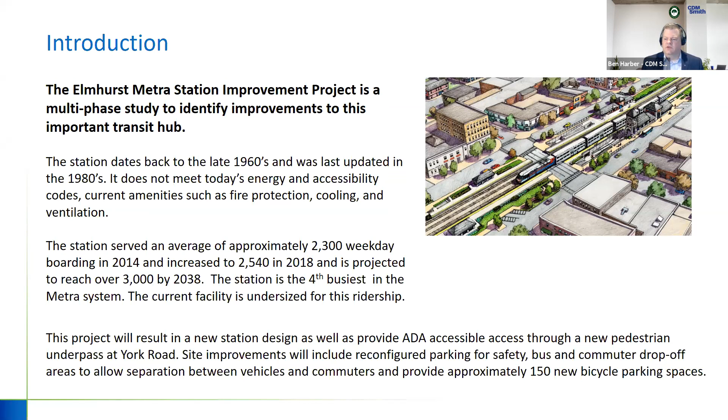So I'm just going to talk a little bit about where we are in the process. As Mayor Morley mentioned, phase 1 engineering was started in late 2016, early 2017. We looked at many different alternatives at that point of relocating the station, renovations to the station, what those impacts would be, and then developing a preferred alternative, as we call it.

We've been working with the Illinois Department of Transportation and our partner agencies, as well as the city, to move through that process. Once we completed or near the end of that process, we have a station footprint, we have a site plan, which I'll explain what that means, but the general plan is in place.

One of the key elements that we want to work with you and the city to develop is the architectural style. So the first part of our phase 2 process are meetings such as this, developing alternative concepts, which I'll discuss, and then moving forward with the final engineering, which will allow the project to go out for bid and then be constructed. Currently, based on the schedule that we have, we're hoping to start construction in 2023.

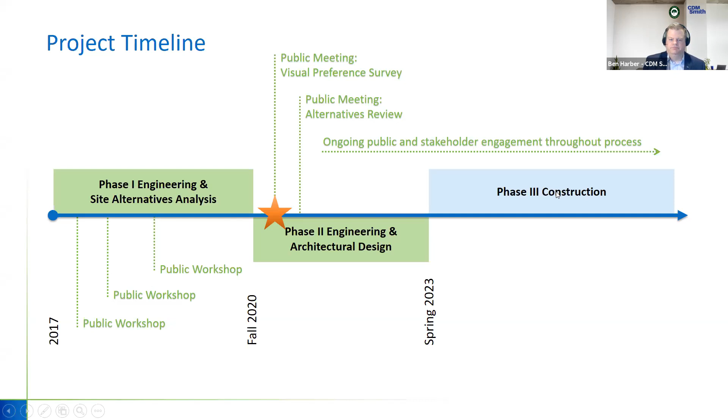So I want to discuss a little bit about your role. First of all, I want to thank everyone again for this evening attending. The idea is to develop preferences or how the public views the downtown and would prefer in terms of an architectural style to see the station.

With that information, our architectural team will look to develop 3 different concepts with slightly different styles. And then eventually that will narrow down to a preferred alternative.

So the first step is the virtual public meeting today. We also have an online visual preference survey, which is very similar to what you're going to see this evening, but it's unmoderated and has rankings of a lot of the slides. So for those that couldn't attend this evening, if you know someone that would like to provide feedback, that online survey link is provided on the city website. And as the mayor mentioned, it'll be open through the end of February. We will have future public meetings, as I mentioned.

Just want to talk a little bit about the existing context. We thought it was extremely important to identify the fact that the city has a long history. Some of the buildings in the downtown go back to the 20s and even before, and then there's also obviously very new developments. The station being the center of the city is a unique opportunity to help the city of Elmhurst in its identity. So that's one of the important things that we're trying to solicit this evening and on the online survey.

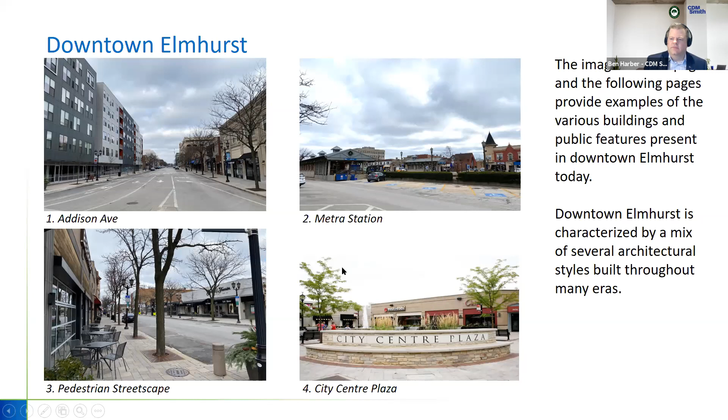So just wanted to show here for information to orientate everyone some of the recent city center developments, as well as some of the existing buildings that go back much further. I think everyone is familiar just to the north of the site on Addison, some of the new development here. This is the existing station looking south. Pedestrian streetscape, all the work that the city has done in the city center, and the fountain and gathering here.

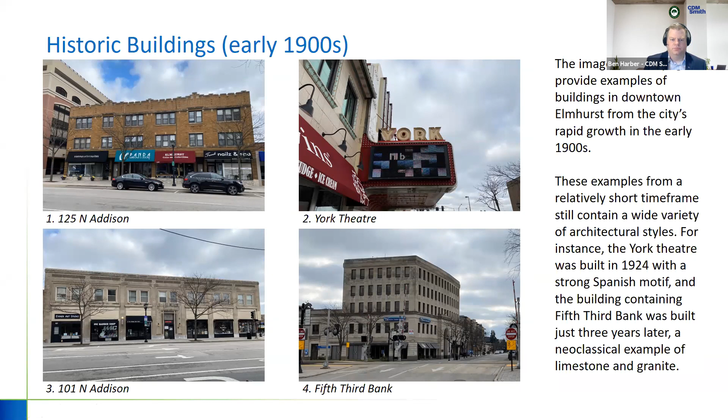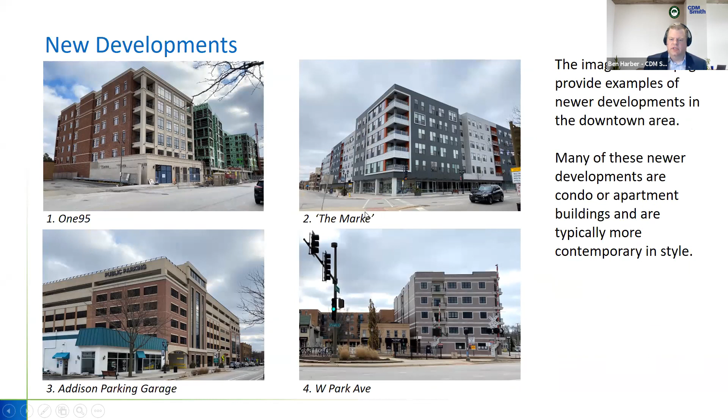Pointing out some of the more historic buildings, 125 North Addison, again, which is just north of the station, York Theater, which is an icon, and several other buildings, again, that are more on the historic nature. The new developments that I think, again, most people are familiar with, but 195 that's under construction currently, and several other buildings that have been completed in the last year or two. Here's another example, going back a little bit further.

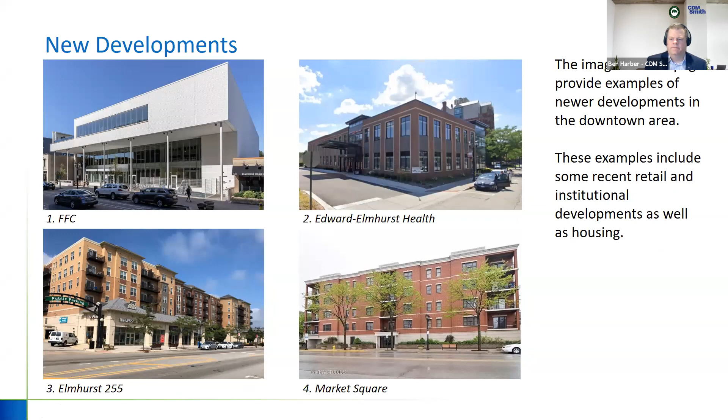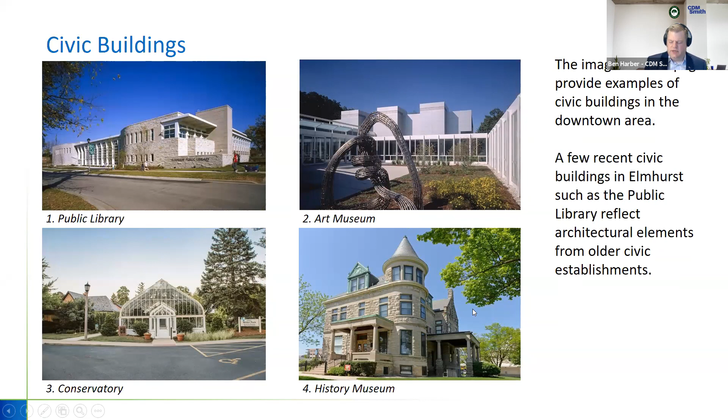I want to identify some of the civic buildings that the city has, like the public library, the art museum, the conservatory over at Wilder Park, the historic museum, City Hall, the police station, and two buildings from Elmhurst University. Most people are familiar with the general architectural aesthetic of the campus. At least these are newer buildings, but there are historic structures on the site as well.

Right now, we don't even have an ADA accessible path along the side of the station. There are a lot of challenges with pedestrians having to walk through traffic, and those with disabilities or other challenges find it a bit difficult to access the station.

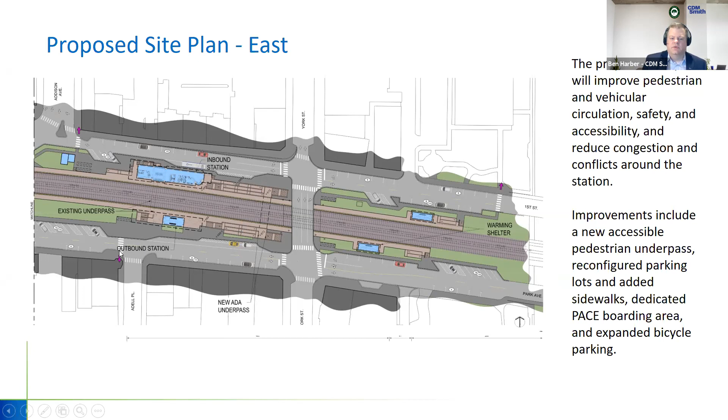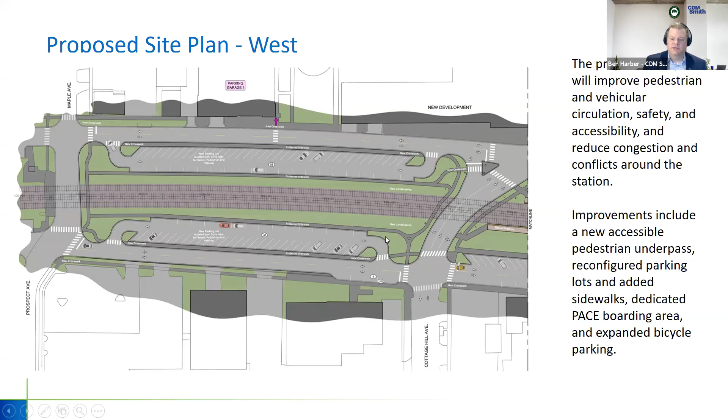We will be rearranging a lot of the parking and drive areas to reduce the amount of paving and increase the aesthetic and opportunities in the downtown, as well as adding crosswalks for pedestrian safety. The project also extends beyond Addison and reconfigures the north and south parking lots, again to provide a path for pedestrians, so that we're not in a situation where people have to walk behind cars with mixed traffic. I'm trying to make this a little bit safer in the downtown, and also add some new green areas.

Here's the proposed floor plan set here today. This matches the plan in terms of its orientation. If you're walking from York, you'd be walking to the left here. We have a 24-hour extended waiting area for people, so when the station's closed we'll still have a warm area to wait for trains while they're running. We also have a vendor space, which is actually larger than the current space.

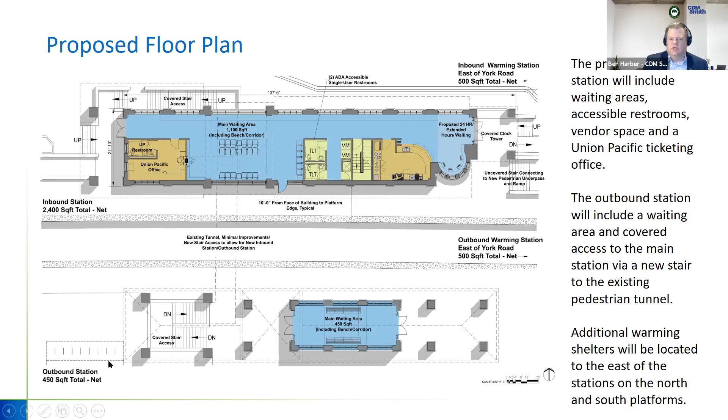We also have ADA accessible toilet rooms, increasing the quantity of those as well, plus additional waiting areas. On the outbound side, we'll also have a waiting area. This will include bike parking on site, and we're also looking to include that in much of the covered space.

So the purpose of today's meeting and workshop is to talk about architectural styles. A lot of us on the call are architects by background, but I want to take time to explain what we're talking about. Just like a house, you may have a footprint or a rectangle, but the outside can look like many different styles - something more traditional, something more modern, different materials. None of that is decided, only the footprint. So as we go through this and seek feedback, we're looking for your thoughts on how you'd like to see the architectural style of the station.

On the online survey that you may have seen, or may take a look at later in terms of rankings, we're going to go through some station examples. I don't want to highlight if something's specifically thought to be modern or a certain style, because a lot of that comes down to your own visual preference, and that's what we're trying to get.

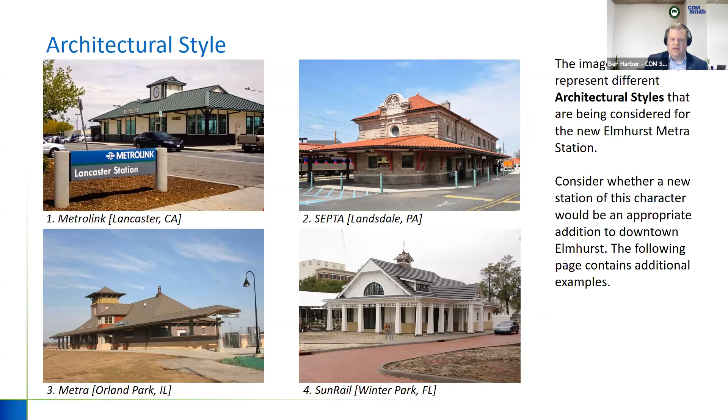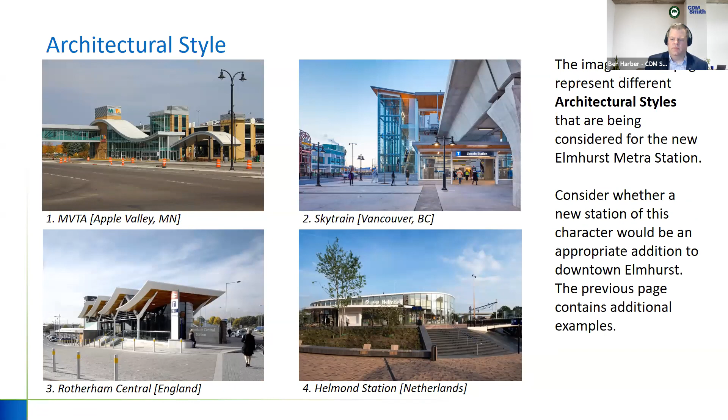We don't want to cloud that. So we have images here, and once we get into the breakout session, you'll have the opportunity to comment whether you like certain images, whether you don't, why, and feel free to provide other buildings or styles you're interested in, or other comments about the project. The idea is to provide a diverse range of styles. We're not pushing any of these. We just want to make sure everyone has an opportunity to voice their opinion.

Beyond just the architectural style of the outside of the station, we also want feedback on a few different elements the project includes. One of those is the station icon. Everyone familiar with Metra stations, train stations, public transit facilities in general, knows it's a civic building, and in most cases we want to identify that. There are different architectural ways to do that—sometimes it's the massing, which would be towers, sometimes it's clock towers, there could be fountains. There are many different ways to do that.

So what we're asking is feedback on if you like any of these images, and even if you don't like any of them, commenting on what you'd like to see to help identify—when you're sitting at York Street or at Addison downtown—that this is the train station. Here are a few other examples.

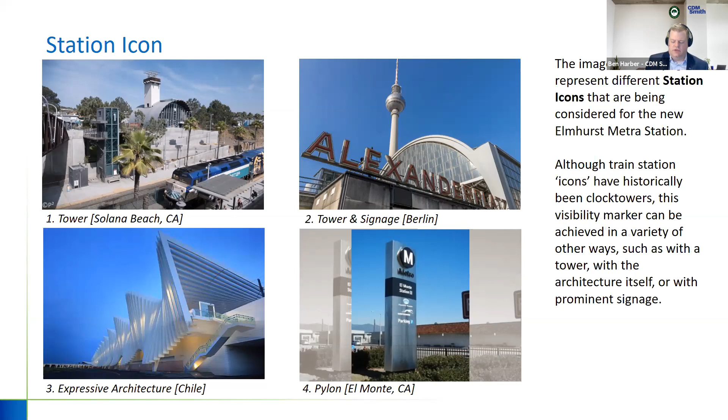Some of these are much larger scale. These will not be directly brought into the architectural concepts—again, that's our job to take the feedback and incorporate that.

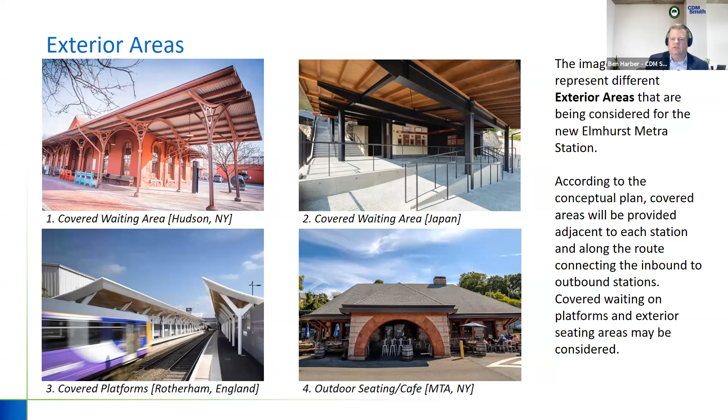We're also going to have waiting areas, under the shelter attached to the station, hopefully areas where you can take your coffee or tea if you're not a commuter during the middle of the day and sit outside on a nice patio, or if you are a commuter and the weather's nice, somewhere you can stand outside. We want your feedback on the architectural style of the exterior areas.

We're also obviously going to have an interior of the station, and the current station is very basic—just a floor, masonry walls, and that's about it. We're very excited to bring something much more unique to the city of Elmhurst. So one of the things we'd also like you to comment on and think about is the character of the interior of the station.

Again, I don't want to say one thing is more modern or less modern, or what materials are included—just want to get your feedback here.

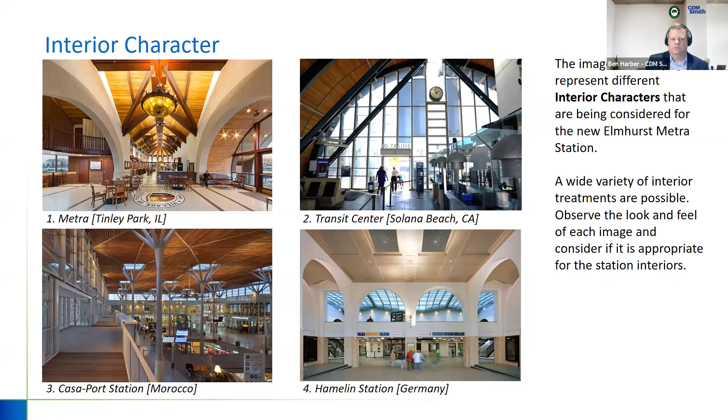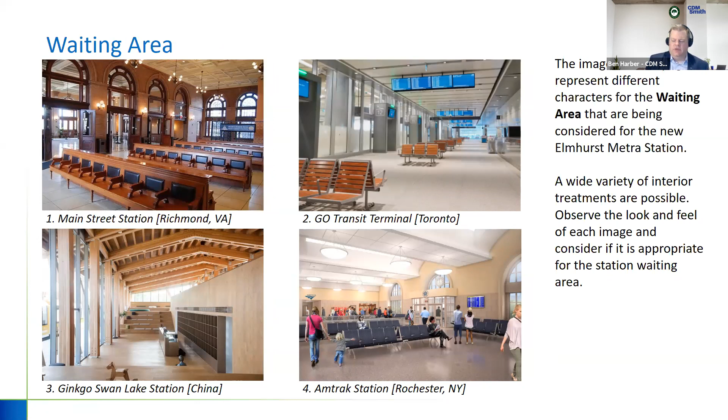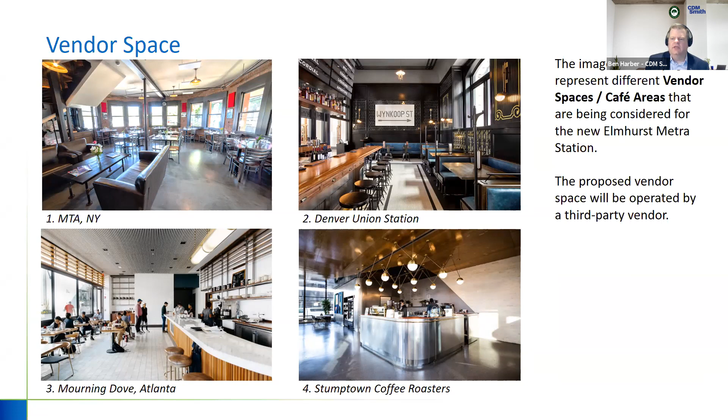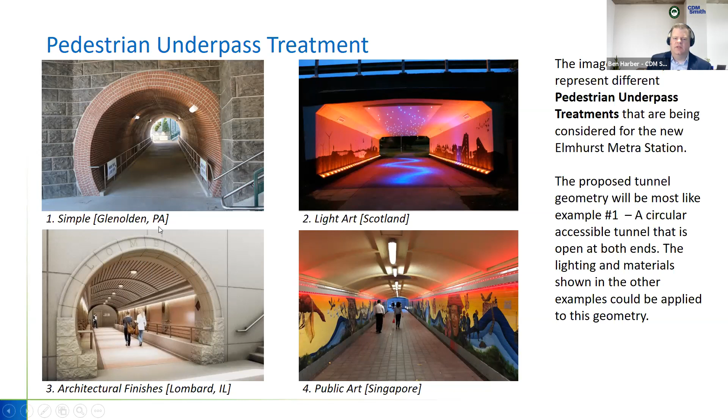What we're trying to identify here is that this one is a little more traditional in look, this one is maybe a little more utilitarian, and this one has opportunities for art, for light, different things. I will say that the pedestrian underpass will be a tube, because of the type of construction the Union Pacific is going to require, so the shape will be round like this—but again, the treatments on the outside are what we're looking for your feedback on.

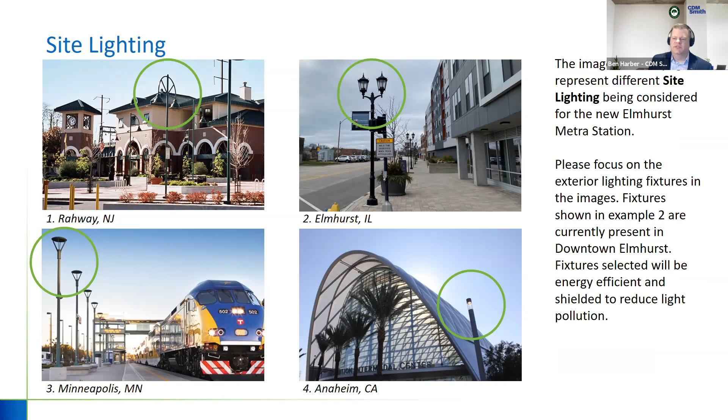Site lighting—the downtown has its own street lights and architectural character, but we'd be open to taking a look at something potentially unique if it's worth it, or we may go with something closer to city standards. We'd love to hear your feedback, not just on how the fixtures look, but more importantly how they function. You can talk about security, or about not wanting it too bright for certain reasons, or other thoughts.

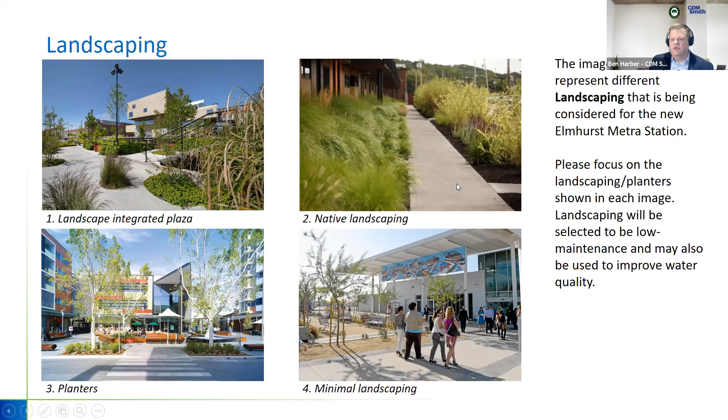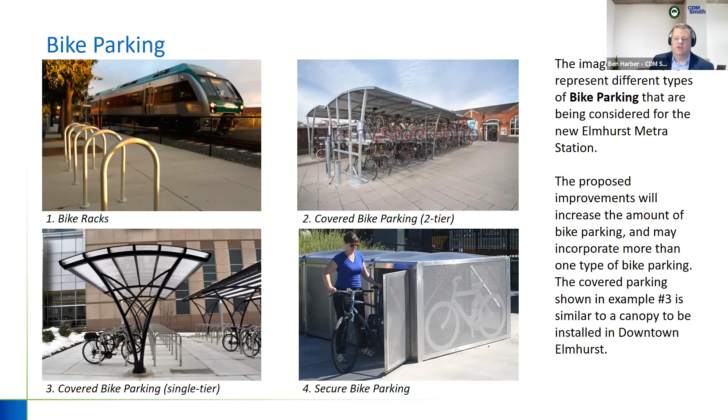We'll have a lot of bike parking, and that was something our funding made a point of—that this station isn't just for commuters riding the train, but about the intermodal connection of bikes, pedestrians, and those getting dropped off by vehicles and buses. So one thing we want to look at is preferences on bike parking. We had good conversations early on about not only the quantity but the quality, and we'd love to hear more about how you'd store your bikes if you ride, and for those who don't, the architectural character again.

It's a little boring to listen to me talk this entire time. The goal was to bring you up to speed on the schedule, talk about decisions made to date, and also what we're going to be talking about in terms of feedback.

What we're going to do is turn everyone loose into our virtual workshop, and I'll explain that in a minute. But before we do, we really, as a team, as the city, everyone involved, want to thank you for your time and input. We'll review all of it and help develop three different concepts. For updates on comments or questions, to provide additional feedback, and to find out about future events, we'll be providing all that information on the Elmhurst website, slash Metra station.

So at this point we're going to open up the virtual meeting room, and I'll go through how that works. The key is you'll need to click or enter one of these links. Colin, our moderator, will include this in the chat window as well. I think, Colin, that will be a hyperlink, is that correct?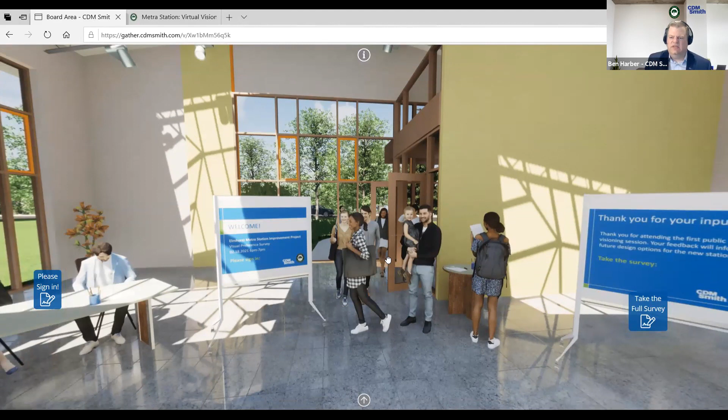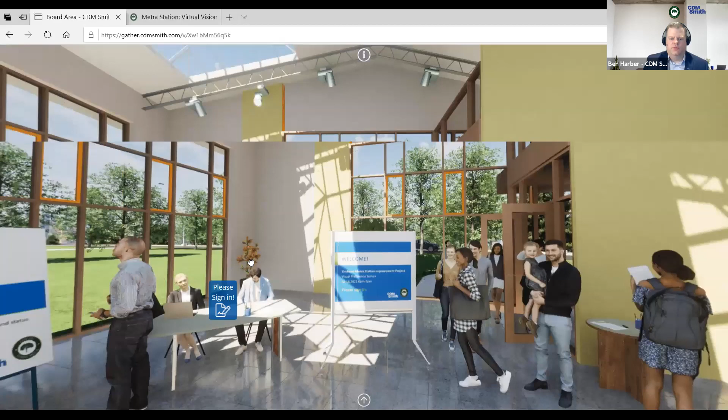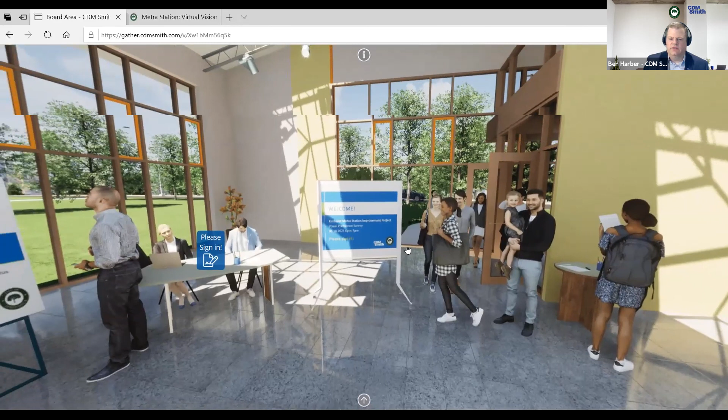So if we were in City Hall, just pretend it's nice and warm and sunny, and we've made it through winter. Here's our virtual room that you can spin around—City of Elmhurst right here. Just like coming into a public meeting, all I'm using is my mouse, holding it down with the left button. If you hold it down and move your mouse right, left, up, or down, that'll help you navigate around the room.

So just like a public workshop, if you came in, you have a little welcome here. Also want to point out that we have a sign-in—you're not required to include any information.

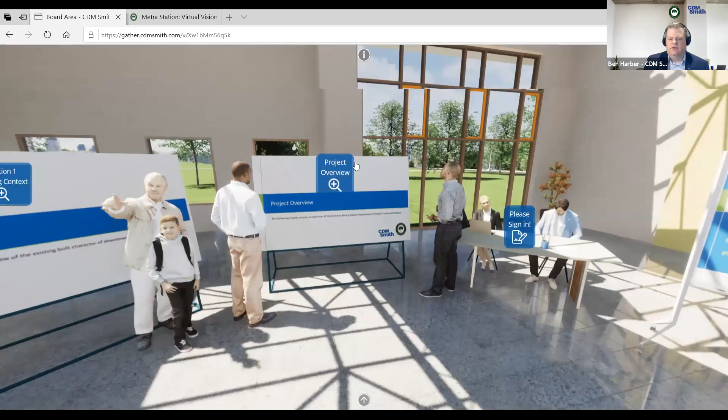This first slide, you'll see these hyperlinks or bubbles here. If you do a single click, it will take you to that board, just like if you were walking from the sign-in over to the first station. The project overview will have all of those slides that I went through to talk a little bit about the history of the station and the schedule. If you want to take a closer look at the station footprint and the site plan, that information is here, in existing context. So you've got the project overview here and the existing information.

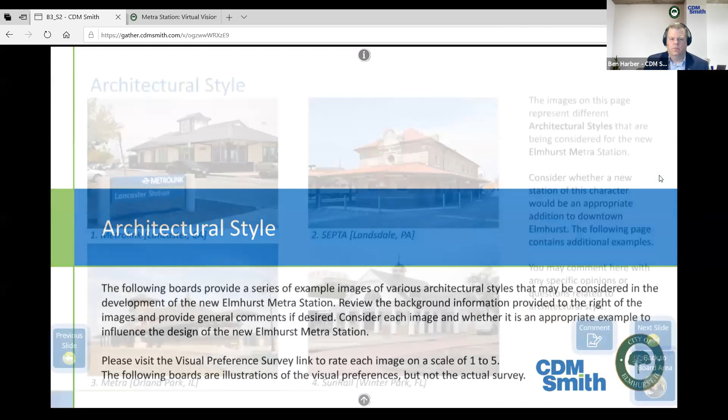Each of these has the opportunity to comment. So when you were taking a look at some of the slides I was going through, this will be an opportunity. Let me just do this on architectural style, for example, to show you. We have the back to board area and a next slide. Again, this should look very familiar from what I was going over.

If you click the comments section here, this is what I was talking about. It's your opportunity to write in if you like some of these, or if you don't like some of these, you can get into more detail and take your time. We're going to keep this open a little bit, probably until about 7:30. So if you want to spend more time going through each of the images and writing a more detailed comment or thoughts, you can do that here. Then you can go on to the next slide.

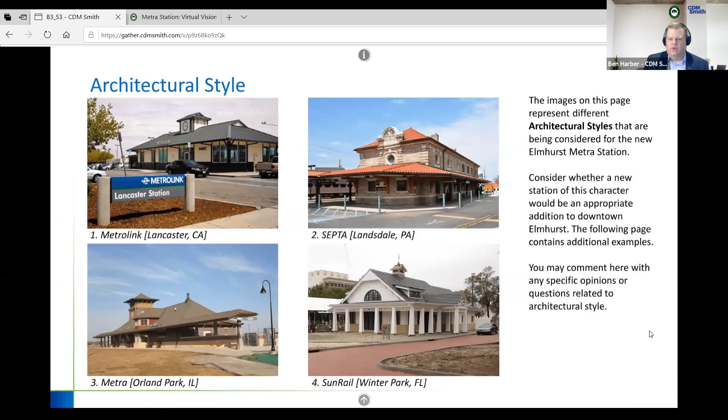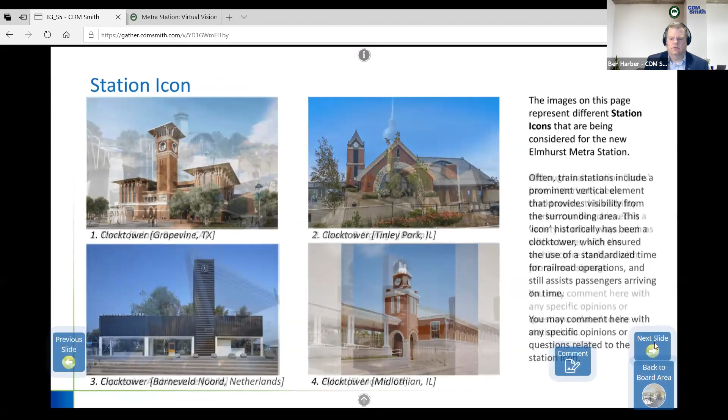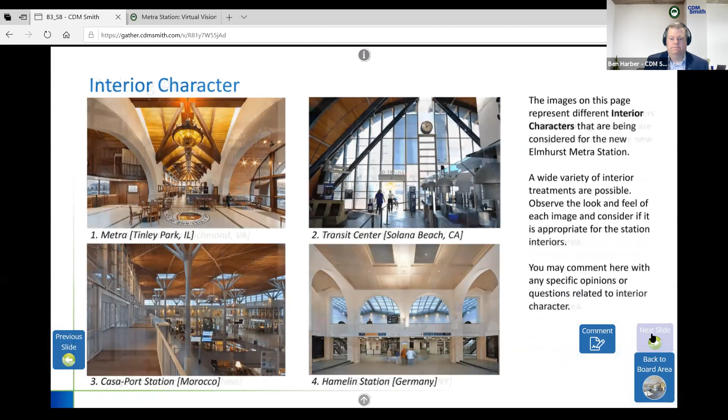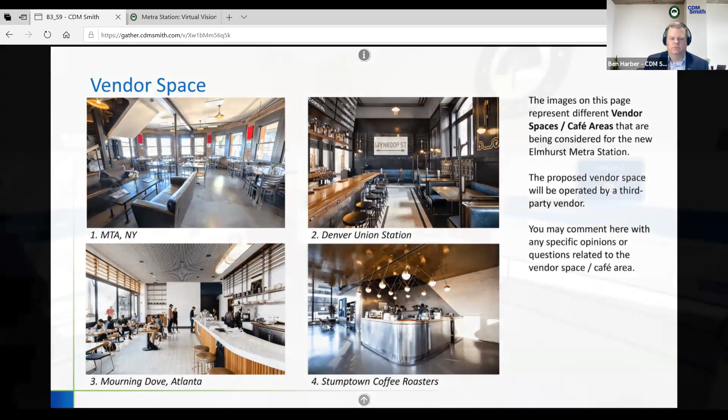This is all architectural style, station icons, interior character, waiting area, vendor space. And when you're completed, whether you want to provide comments or not for each of these, you can go back to the board area and just continue around the room.

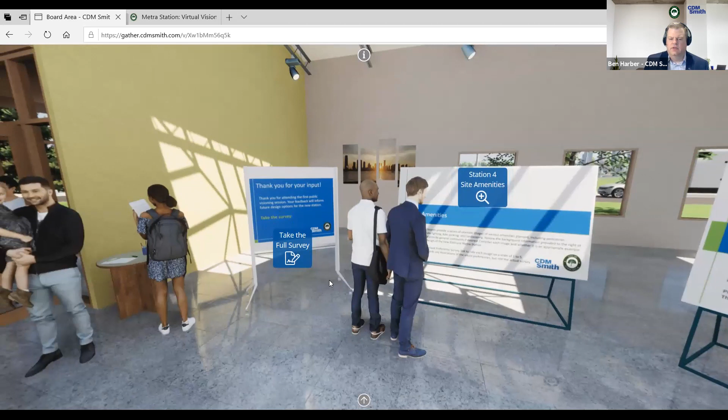The other thing that we have at the very end, while the website for the city does have the visual preference survey, we also have a link at the end. You don't have to use this if you don't want to, but that will just take you to the website for the survey.

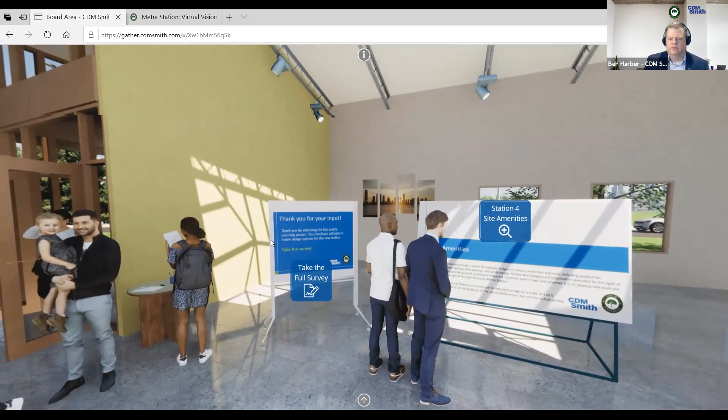So with that, I'm going to stop sharing. Colin, I know we're not going to take questions right now when it comes to the station itself. We're allowing, in the comments section, if people have questions or comments, that we'll respond to later or on the boards. But are there any common questions or concerns about accessing this link or how to utilize it? I can spend a few minutes before turning everyone loose to make sure as many people as possible have the opportunity.

Yeah, I think there were one or two questions about accessing this information, and I think I might be able to handle them. We will be posting a recording of this meeting on the project website, and I believe we can also post a PDF of the presentation on the project website for those that just want to flip through it. I'll be posting here, in just a minute, a link to the virtual meeting room that Ben just provided a tour of. That'll conclude this portion of the meeting, and you can click on that link, which takes you to the virtual meeting room that you can explore on your own.

So I think those were the main logistical questions. Again, I know there are a couple other questions that came in, and we will review all of those and provide an FAQ on the website.